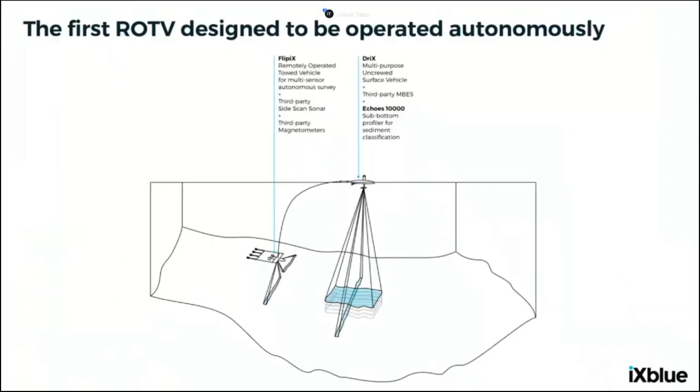Well, if you tell me about hydrography, about geophysics and UXO, it sounds pretty much like maritime renewables to me. Do you plan to use FlipiX in support, for example, of installation and inspection for wind farms? Of course, out of all the discussion we had with our clients, the EMR market is a key driver toward this integrated solution. But, looking more at the detail of how it looks, we keep the DRIX as the main platform to convey the multibeam sonar and the sub-bottom profiler.

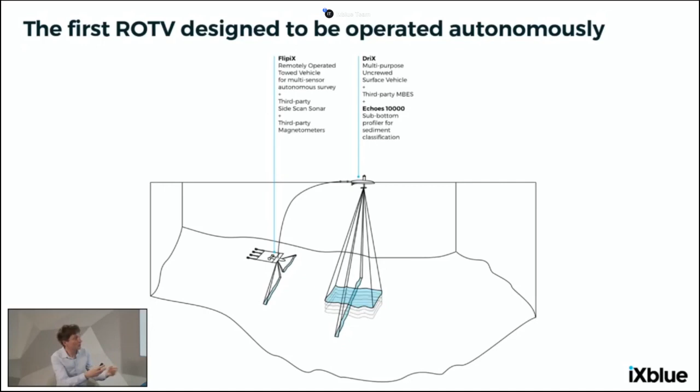And in the back of it, you've got FlipiX, which is being towed by the DRIX, which conveys the side scan sonar and the magnetometer. Just to give an order of magnitude, we've got a cable length in the range of 250 meters behind the DRIX. And typically, FlipiX is going to be operating down to water depth of 50 meters. So we truly think it's a kind of unique combination that brings a true differentiation to the market. All right, so DRIX plus FlipiX, I get it. That's a game changer for autonomous survey, and it brings the most comprehensive survey solution to the market.

Great. But could you please provide us with more detail regarding the sonar measurement quality, for instance? Okay. So, from a client perspective, in terms of client need, it's very much about measurement quality and delivering measurement to the client in the most efficient way. And it's also having a system with an extended operating envelope to cope with all their needs. So when you think about side scan sonar measurement, having a stable motion for the sonar as it's being towed is extremely important. And when we started designing FlipiX, it was with that notion of active motion control.

If you look at the waterfall display of a side scan sonar, if the sonar is moving, you will see some side artifacts on the edge of the image that usually will force you to plan your survey lines in a conservative way, to try to reduce the risk of a gap between measurements in two lines. So with FlipiX and its active motion control, you really reduce the risk of a rerun to fill a mosaic gap.

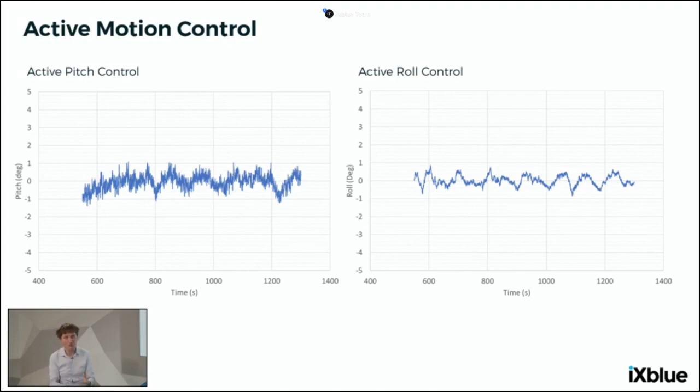So, beyond enhancing the measurement quality, having a stable platform and the active motion control also enables faster U-turns, which is also very important from an operational standpoint, gaining time on your operation cycle when you go from one line to the other.

And also, in terms of performance, we typically run FlipiX at altitude in the range of 5 meters. Okay. But depending on the terrain, you can probably go down. We routinely go down to 2 meters as well. So it's what we routinely achieve when we operate it, with some variation on the altitude in the range of a few tens of centimeters. Well, so you overfly the seabed at 2 meters of altitude. That's impressive.

I understand you can use it with the DRIX USV or with a USV, as a matter of fact. How about using it with survey vessels? So of course you can use FlipiX with a traditional survey vessel. At the end of the day, it's an active tow body. FlipiX was designed with a pressure rating of 300 meters of water depth. And of course, you can use it with a traditional survey winch, with a coaxial cable that you will usually find on these winches. All right.

Look, if I were a service providing company, what edge would buying and using a FlipiX give me? So we already mentioned it, the combination of DRIX and FlipiX is very much about cost saving and increasing operation efficiency. And we, as iXblue, tried to reuse all the return of experience that we had on the DRIX when we started designing FlipiX. And we think it's really the very first ROTV that was truly designed for autonomous operation when combined with a USV. And currently, we strongly think it's a unique solution on the market.

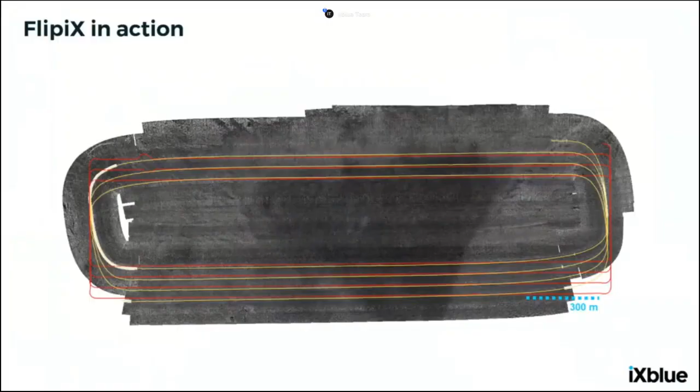Just to give you a practical example, this one is a survey that we did around a site which has an anchoring chain at the bottom of the graph here. And this graph gives you an idea of the kind of survey line that we did in this operation. The survey area is divided in 2 zones. And as you can see, to exit one line, U-turn and go to the other one, we need something like a distance of 300 meters. And this distance is much reduced compared to what you would have with a more traditional survey vessel.

And also to mention that during the U-turn, FlipiX will remain at its operating depth or altitude. So you not only save in terms of reducing the distance for the U-turn, but also you don't need to bring the ROTV back to the surface during the turn. So all this is a way to reduce the operating time. Okay, this has been taken using the EdgeTech sonar, right? Yeah, of course.

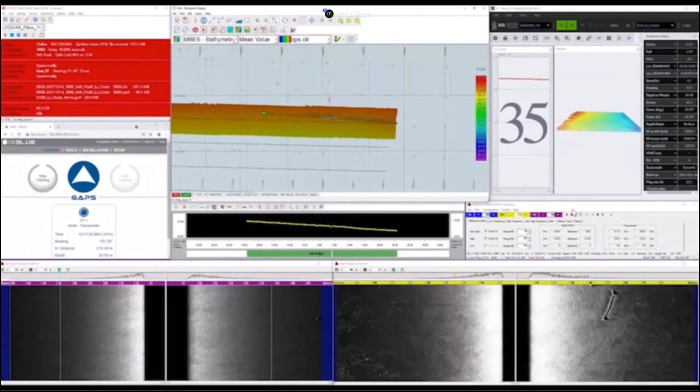If we look at the way it looks from the command center, the operation I displayed before was done remotely in over-the-horizon mode from our control center. On the top side, you can see the multibeam data being acquired with the FlipiX position in the back. And at the bottom, you can see the waterfall display of the side scan sonar image as it's being built. If we have a closer look at these data, you can also see that the edge of the sonar image is very smooth, which clearly highlights the stability of the FlipiX platform.

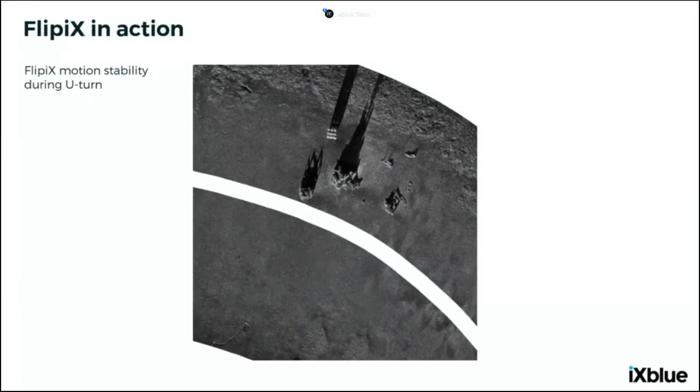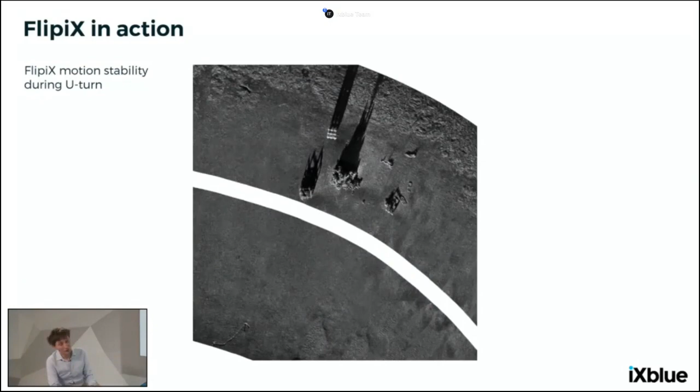And just to conclude on that side, I really like showing this picture in the sense that it's a sonar image that was done during a U-turn of FlipiX, and you can still see the very smooth edge of the image. We keep a very good image quality. Not to say that the surveyor will start using the measurement during the U-turn, but once again, it's a way to highlight the stability of the FlipiX platform.

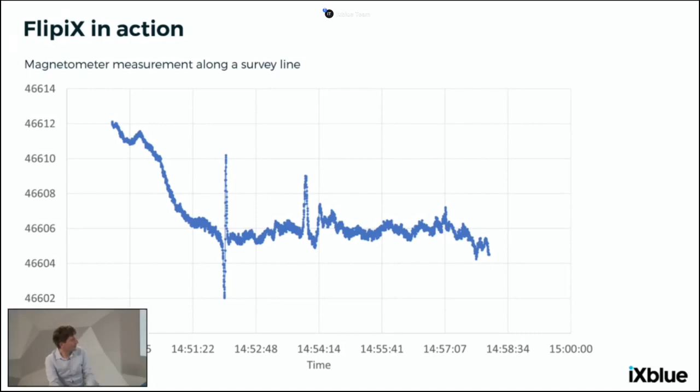So you can see some targets that are being detected through peaks that you see on the graph. But more interestingly, it also gives you an idea of the kind of noise that you will get. And here we're well within the plus or minus 1 nanotesla in terms of the noise on the magnetic field.

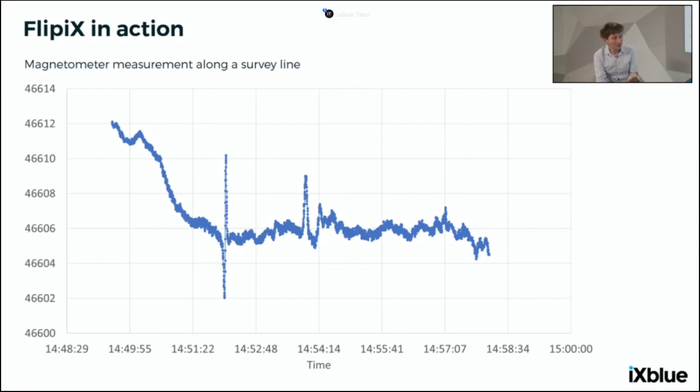A big part of it is the composite construction of FlipiX. FlipiX has a very low magnetic signature. And in practice, we just have to tow the magnetometer within the length of 1.5 meters behind FlipiX.

All right, thank you, Stefan. So up until now, we mentioned what FlipiX was, the advantages it brought to the market, to the sensors which were mounted on board. I do have a last question for you, if you don't mind. How about launch and recovery? Yeah. So Guillaume, you're perfectly right. Whenever you're dealing with maritime autonomous systems, the launch and recovery is a question that we get from customers, because one of the key operational steps is getting things in and out of water.

We also provide a very simple spooler to wind and unwind the 250 meters of towing cable in between DriX and FlipiX. And within the DriX, you need to install a small multiplexer for the communication over the cable, as well as a 10-meter floating extension cable, and we will see the way it's used afterward.